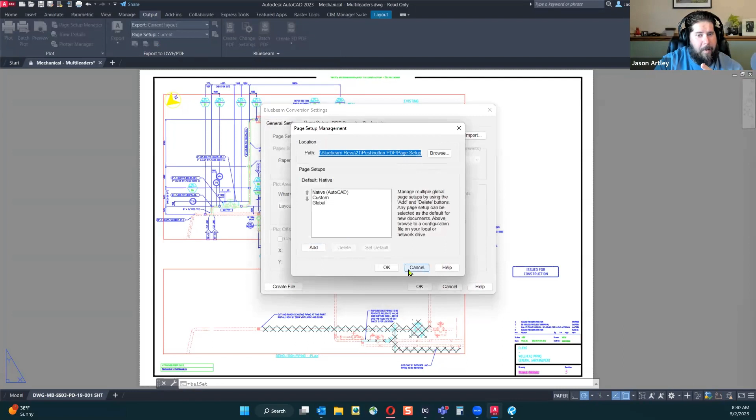I could choose my SHX fonts. I can create my file. There's nothing in here that's going to allow me to take my layers. And if I'm wrong, please let me know, because I've never seen it. And there's some other things in here, and it will do bookmarks, which is cool, but I've never seen it either. I'd love to know if anyone has found it.

Whenever I'm in AutoCAD or Civil 3D and I'm printing PDF, I don't bother with these tools. Now, if I was doing 3D PDFs, sure, in AutoCAD. If I'm doing 3D in AutoCAD, that also means I'm getting kidnapped, and you should call the authorities, because I'd rather be using Fusion for that.

But yeah, I mean, the plugin for Revit is usable, I would say, right? Because you get the ability to create 3D PDFs. You also get to, from an architectural standpoint, for those architectural folks, or even if you're just receiving an architectural model, the ability to print rooms—rooms are what they're called in Revit, and spaces is what they're called in Revu.

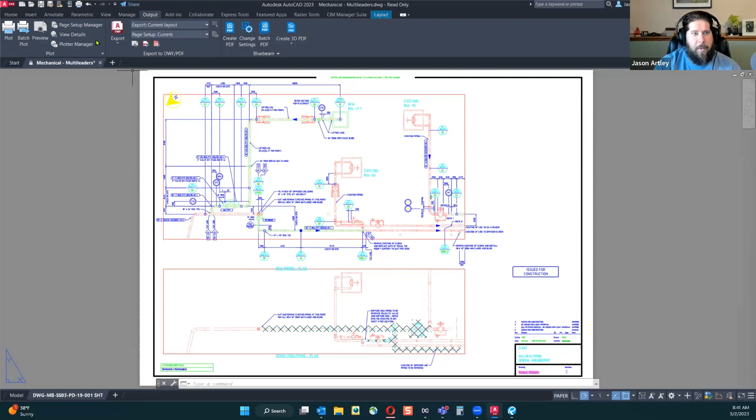Yes. So if you're in AutoCAD and you want to print to Revu and take advantage of layers, let's go back, let's look while we're in here. There's no plugin yet, Doug. That's good for 24. Yeah, that's good to know too, Doug.

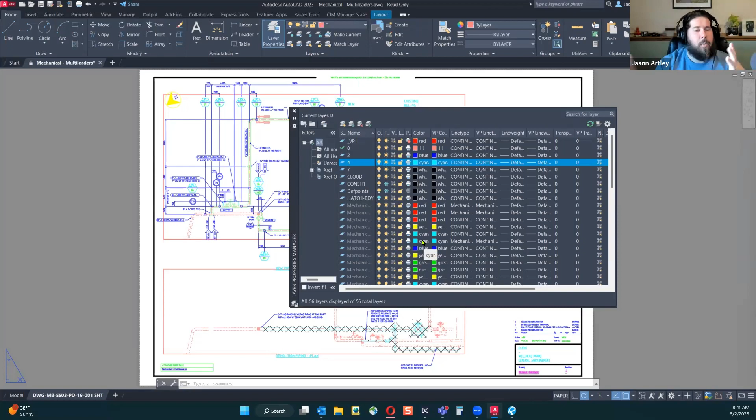Layers allow you to turn things on and off. So you can see when I toggle them off, some of these callouts are going away. I can change my color. I can freeze them. I've got control of if they can print. This is the backbone of using AutoCAD. It's like having a green pencil and a red pencil and a blue pencil—each one is going to symbolize something else.

So unless you're really old school—well, sorry, seasoned—and go line weights. Yeah, pen plot styles, those are the good old days. For those of us that didn't know, back in the day there were pen plot styles for the specific pen from the plotter to do line weights, and typically it was just the color association to the pen plot style you're using in your plotter.

And the plotter actually had a pen, it would go grab the pen. Yeah, oh yeah, nightmare fuel right there.

Flashbacks. All right, so I hit the plot button here from my quick access toolbar in AutoCAD, and I'm going over here to choose my print plotter. Oh boy, I got a lot. Microsoft Print PDF, Bluebeam PDF, and AutoCAD PDF. I've got all these settings.

Now the one you want is this guy down here, DWG to PDF. Why do we want this one? This one gives us a button that the other ones don't. So I'm going to go to Bluebeam PDF - see that? There's nothing here. But when I go to DWG to PDF, I get a button, PDF options.

When I select PDF options, look at this - include layer information. This means it's going to incorporate that metadata of my drawing layers into that PDF as we go.

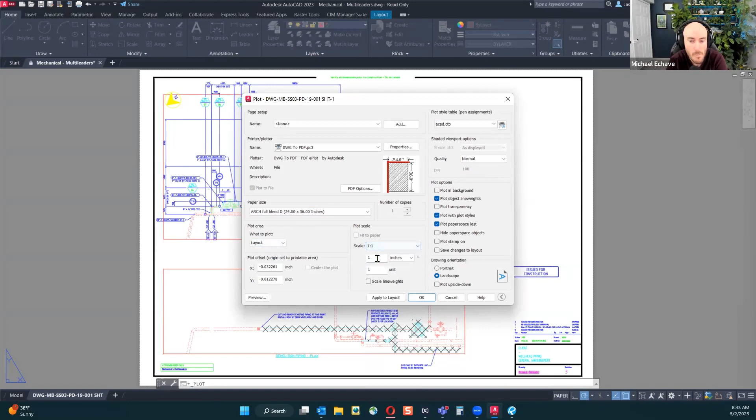What in the world is going on here? So this is a metric drawing, so now I'm really out of my world. What paper size do I want for a metric drawing? I have no idea, oh boy.

Metric people, look away, it's about to get ugly. A0 is what you're saying? A0, there we go. Maybe - let's preview, let's see. It doesn't have... that ain't gonna work.

Now my window popped over here. I swear I've printed in AutoCAD before, by the way - this isn't my first time. It's just... why is it metric, A0? It's just out of the box. Yeah, yeah, this is out of the box metric.

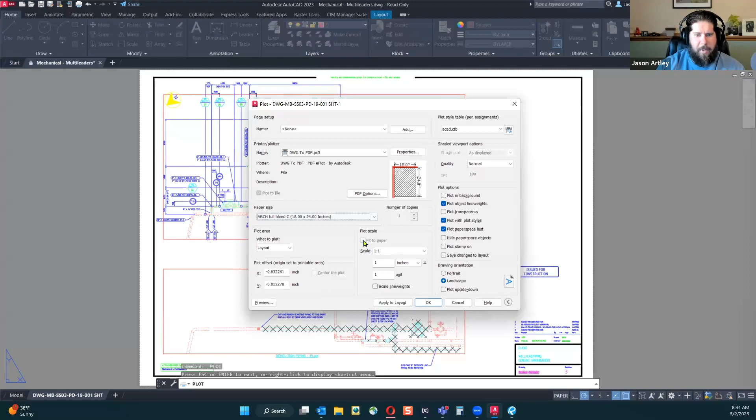Where's my fit to paper option? I can't live without you. I was intentionally wanting that to make Brian cringe.

Using layout - is that what my difference is? There we go, fit to paper, send to the plot, get her done. There we go, that's close enough. We're playing horseshoes here, all right.

Sheldon, yeah same - back when I was in industry, one of my firms that I worked at before used pen plot style too, even when they weren't plotting to a plotter anymore. That's still how they had their assignments and adopted layers. So fun stuff.

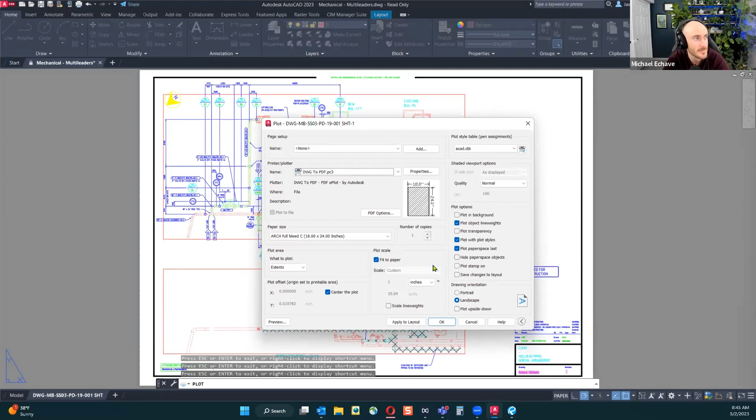All right, there we go - layer information, good, fit to paper. Now I could set this to scale, make it proper, but again, we're going to go into Revu and we're going to calibrate it. So this is all intentional, by the way, totally.

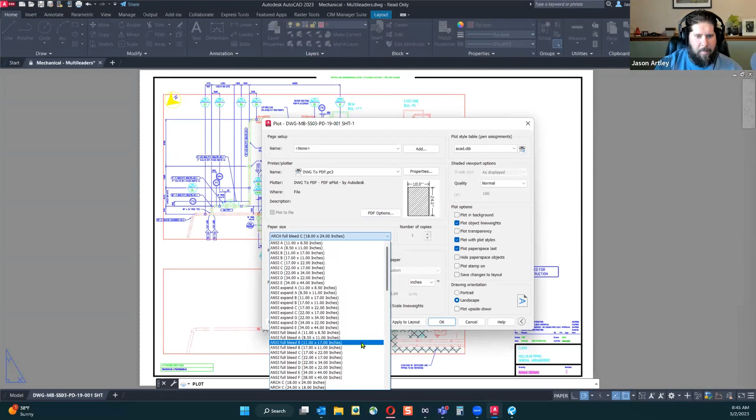So wait, Bruce is saying use C in metric. Fine. I don't have a C in metric - Arch, ANSI. That's still inches though, and it's close enough. I would just print it. Print it, we'll do it live. All right, we're gonna hit OK.

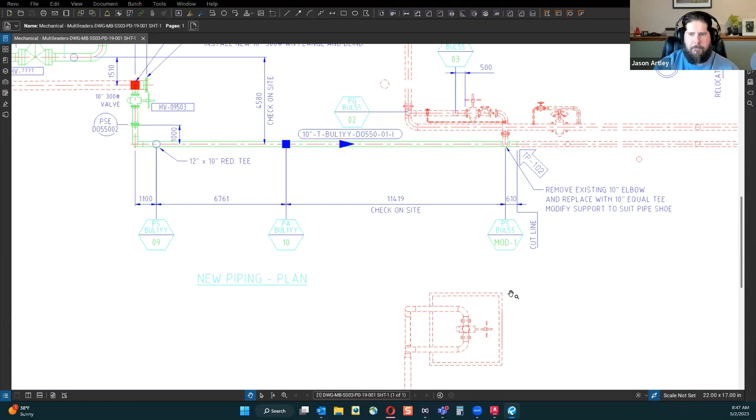Just the liability of having a scale - that's always a questionable offense, I would say. So I think the best would be to have a specific known dimension from where you're at, or a scale bar. Yep, scale bars - they've been a part of drafting practices for over 100 years, so why did we stop?

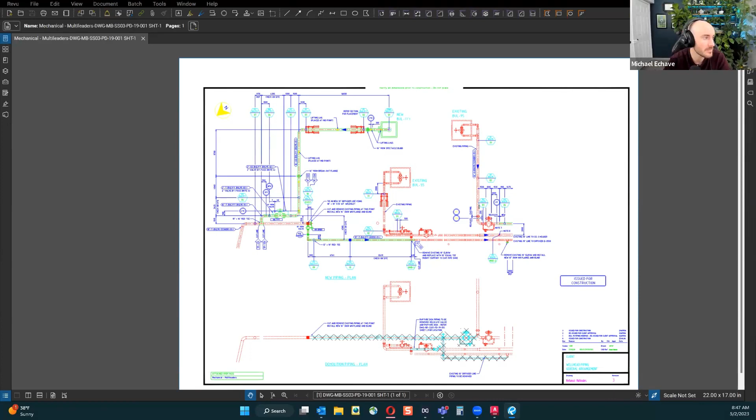So there's that, because folks thought it was more meant for actually having your scale and then having your table to measure it from. So I still think it's valuable here to calibrate and review your own. But we'll get a little off the CAD side a bit.

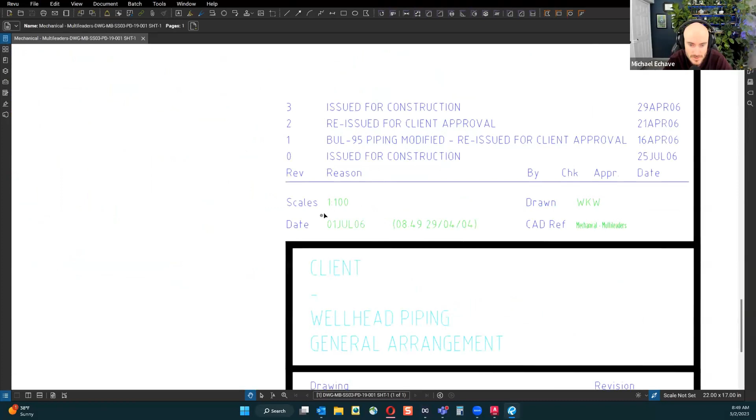See, there's no scale bar here. Scale's one equals 100 though, so there is a scale, but there's no scale bar, so I have no reference. Now in this drawing I do see that I have dimensions that are metric that I could calibrate to. This one, check on site, that's not a good one, right? I want to go check a couple different ones to make sure this works.

Now, one thing to mention, this is a metric drawing, and I've never done metric stuff in Revu, so this will be interesting. That's why I'm surprised you picked a metric. I'm just experimenting today, we're doing something different, we're branching out. It's May, we're blooming into new things. It's way past bloom season here though. Is there a metric setting in here? Units? All I know is it reached 100 this last weekend. It hasn't even hit 60 here yet. So there's that, all right, let's get on with it.

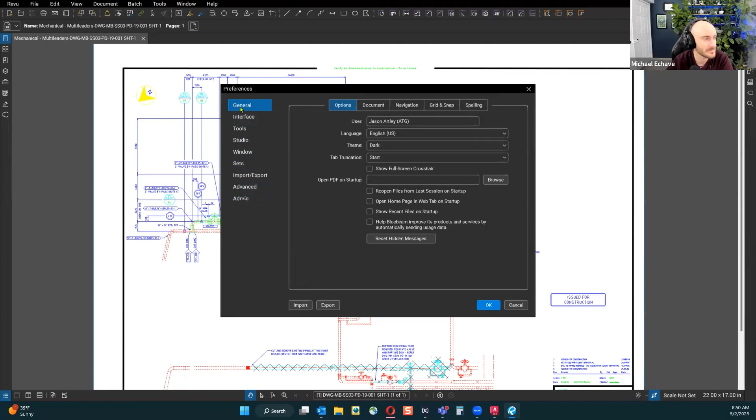So I'm going to calibrate. And when I'm calibrating, I want to choose the longest distance that I can to make it a little bit more accurate. So I'm going to go after this 16,830. It doesn't say check on site like that one does. So I'm going to calibrate to this one, and then go check a couple different ones and see if it works, right?

So when I go to apply scale to pages, bottom right corner - how else can you apply scale? Does it really say that, Alex? It says do not scale. Oh, verify all dimensions prior to construction, do not scale. I see what you're saying there, Alex, but I saw nothing. All right, like that, we'll just erase it. We're playing around here, we're playing around. All right, rabbit hole, keep me on track.

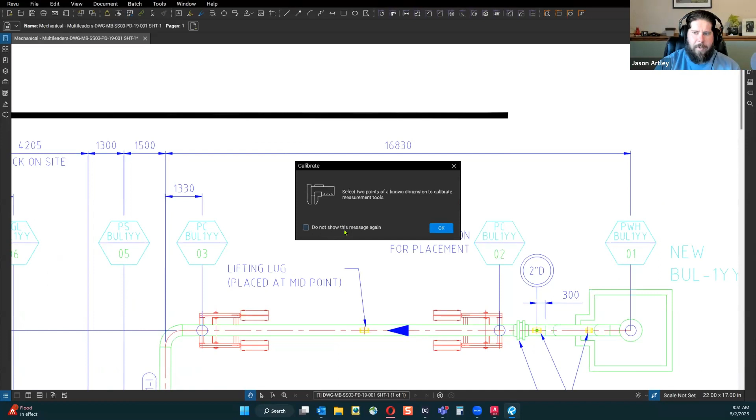So I'm going to go to custom and go to calibrate. It's going to say select two points of known dimension to calibrate measurement tools. Now, never turn this off. I wish this was not a thing, because you should always be aware that you need to do this. And I'm going to snap. If you're at the point where it makes sense for us, but if I was in the software all day, I wouldn't want to see that UI.

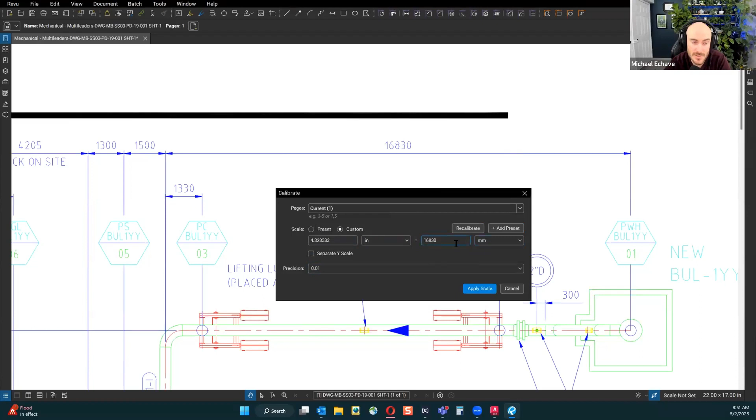So this is where things get weird, because this thinks I'm in millimeters. So what I just did is picked one point from the left, one point to the right, and then it went away. Let me do it again. Yeah, that's the actual measurement on the page. The other, just go to your measurements panel on the right.

Oh, my Zoom window is blocking me.

So the measurements on the page, the one on the left, is that measurement. Basically, in paper space, this actual measurement on the paper from end to end is that. And to the right is what the actual measurement is. So you're all looking at what that is.

The other dot next to custom, to the left, there is a preset. Preset would be for a preset dimension on the page that was printed at scale. Now that I'm getting more into this, I'm always like, yeah, of course it's printed to scale. Well, that's because I printed it, but we're not always in control of receiving PDFs.

So I would just be hyper aware of what we're using to scale our PDFs and get accurate measurements from, and how—I guess, who's liable, right? That's always going to be the question. Just things to be concerned about.

Yep, and there was a question in the chat—we're crossing wires here. I like that term, Alex. I'm going inches to millimeters. Now, 1 inch equals 25.4 millimeters. That math is pretty sound. That's all Revu's doing, is that math for me, 1 times 25.4, or whatever if I was going to centimeters. Well, we can see.

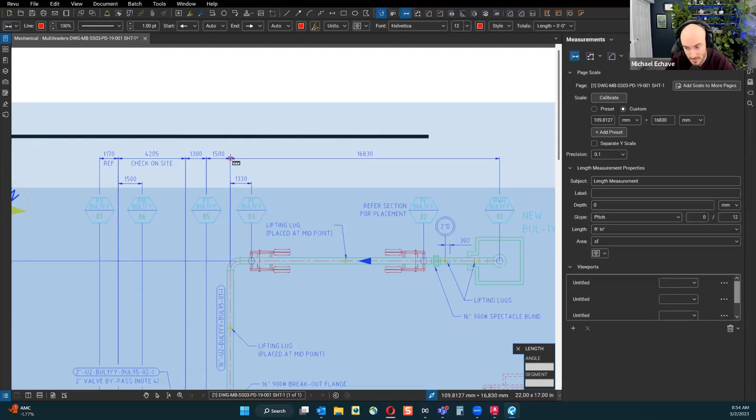All right, so I set the drawing scale to 109.8 millimeters equals 16,830. Before we do that, we need to be aware that for some reason, when you printed this from AutoCAD, it came in with viewports. So in the bottom right, there's these untitled viewports here. That's weird. That is weird.

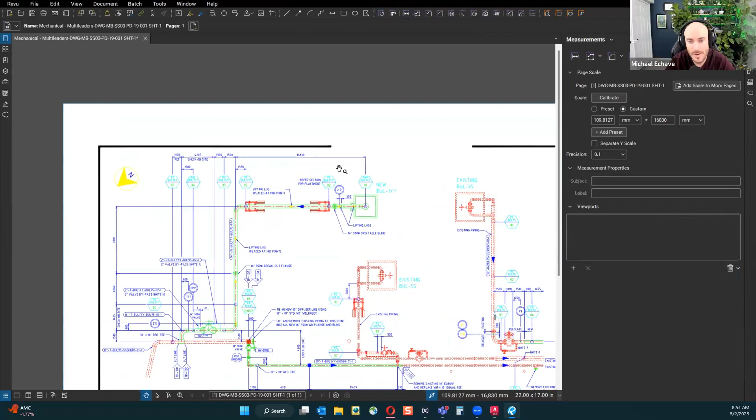Yeah, but they're all—so that came with AutoCAD. Yeah, let's just get rid of those. Clear all from document. I wonder why. Maybe we'll talk about viewports while we're in here, because that's a CAD term that does get confused. So we got the time.

All right, so yeah, as Doug says, if you're trying to be more accurate than 1/10 of a millimeter, you're trying too hard. Yes, correct. All right, so back on track.

I calibrated to this 16,830. Now, remember, this PDF is not to scale—we did it intentionally not to scale from AutoCAD, and we're trying to deal with this now that we have it in PDF format. We don't have that scale bar to reference, so we calibrated to a known dimension. And I always recommend choosing a long one. Once it's calibrated, go in first and check that length and make sure it matches.

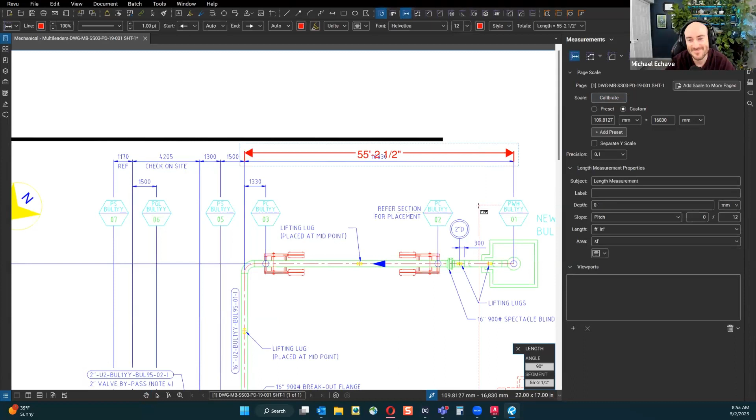Now, again, my units are all goofy, but that's okay, because one of the cool things we did inside of Revu 20, when that came out, was give you the ability—or 20.1 was to give you that additional measurement capability. So now we can go in here and see.

So there's obviously a rounding issue. Well, it's not really a rounding issue. No, it's not, right? That is weird. Because I set my precision—that should not be that. Okay. So Alex says, guessing the error came from switching your units on the set dimension.

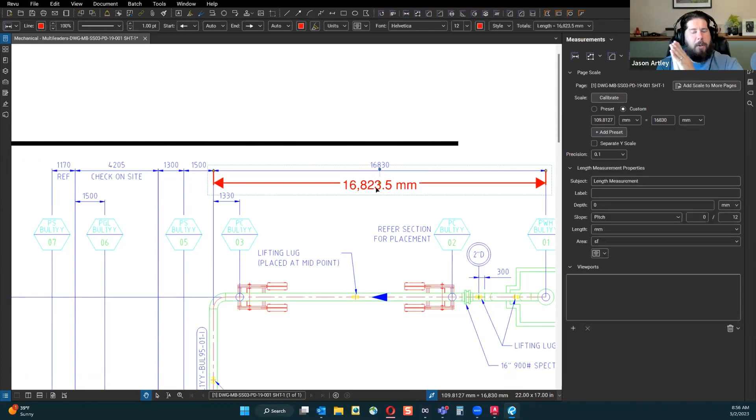That's all right, let's figure this out. This is a problem you may encounter, so let's figure that out. That's what we do here at MCR. All right, it may have been your snap points from your calibration too. Could be—I would calibrate again.

I wouldn't click where the arrows are—I would click where the line is, line to line. Okay, so I'm calibrating again, and we're going to go from the endpoint of that line to the endpoint of that line. And it kept that same 16,830. And we'll go ahead and hit apply scale.

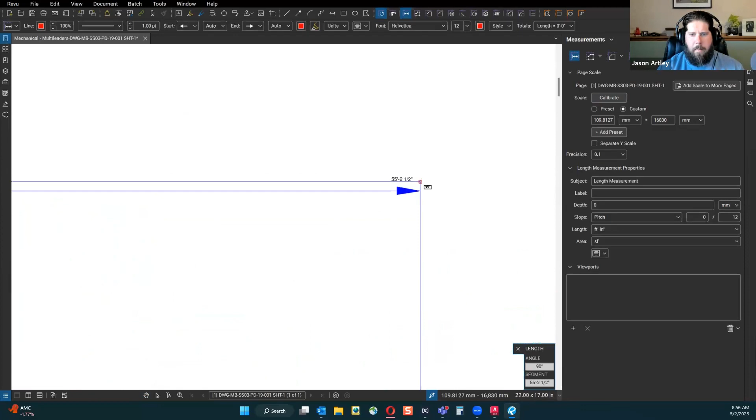Now let's go in and measure again. So I'm going to choose the same exact points that I calibrated from. Same dimension—interesting. So this is telling me... there we go, we're good. We're good now.

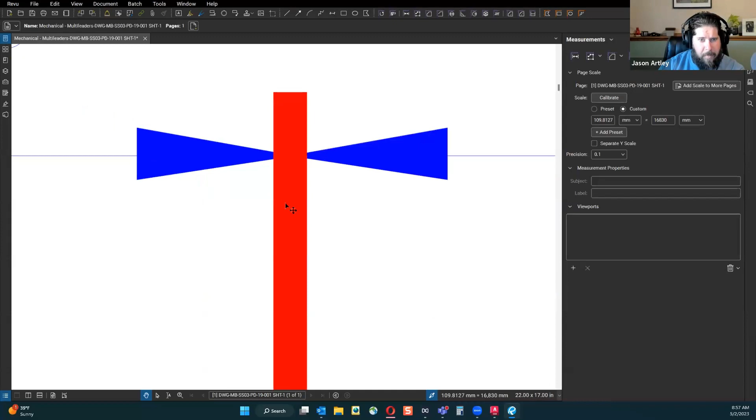So I'm guessing what happened was that when I calibrated, I clicked from the arrows, and I'm not a fan of snapping to multiple things. That just comes from the topic we had the other day. Oh, see, look at that. Yeah. That's not right. So there we go.

Hector had a question: is there a way to embed fonts in Bluebeam, so when others view the PDF file, all the symbols show correctly?

I don't know about embed, but putting my CAD manager hat on from years gone by, I always use a true type font or a Windows font, something common. When you have weird fonts, you're going to get errors when you send your CAD files out anyway. Same thing could happen with your Revu PDFs. But there was an option in AutoCAD to add your SHX fonts, your shapefile fonts.

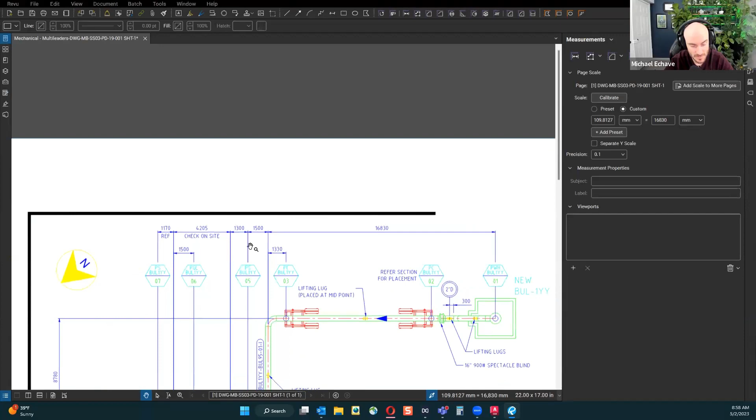Maybe we'll go back and test that if we get time. But I know Revu goes off your Windows-based fonts, so true type fonts. So what I did, I calibrated, I checked that dimension.

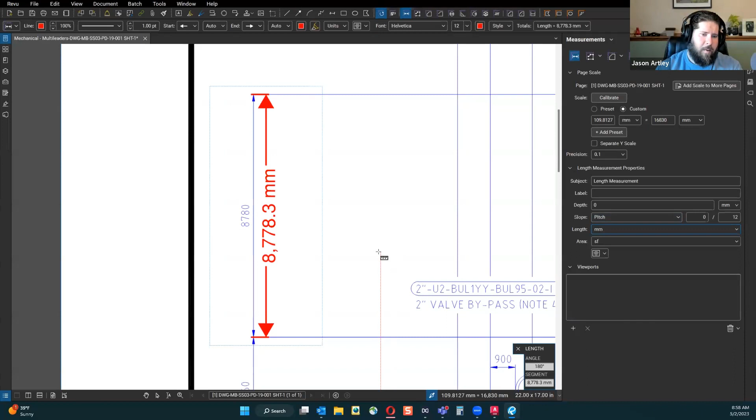Going that way, I want to go check this one as well. So I'm going to come over here, drop in a line. Now again, if we're just getting close enough, that's fine. But I don't like that, this is a sloppy drawing. We're determining, why don't we already just turn the rounding up? Turn off the precision. Yeah, there we go.

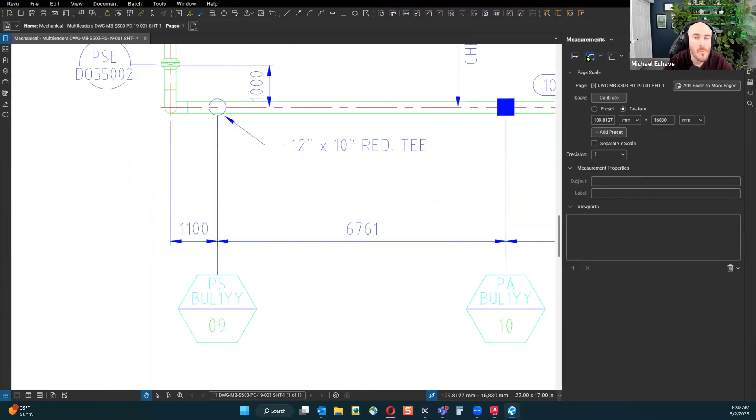What's that we're saying about crayons and sharp pencils and all that? I mean, if you were drawing at scale, it would work. This is just you measuring things from a known dimension, which obviously we're seeing the issues of it. Yeah, the drawing told us straight up, don't scale. There's issues there. But we're going to call this close enough for what we needed to do.

Hey Jason, what would be the easiest way to not have to keep hitting millimeters on your dimension each time? What would be the easiest way to do that without doing that? Saving it to our tool chest. Oh, there we go. Because, okay, let's go do this.

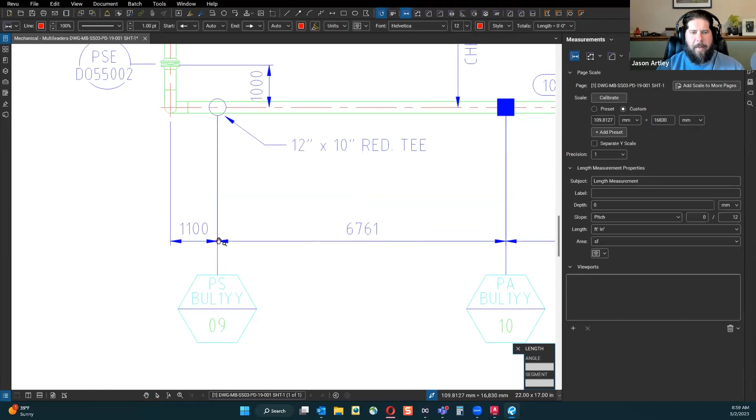So what I'm doing is I keep using the same length tool, and then I come over here and I set length to feet, from feet and inches down to millimeter, right? Now the next time I go place a dimension, it's still going to default back to inches, right? So if I come in here and I actually save that setting, go to my tool chest, my recent tools is going to have that length measurement already set up for millimeters. There we go. So if I wanted to set that up, have my millimeter one, I can just drag that down and keep using that tool instead of doing the extra clicks.

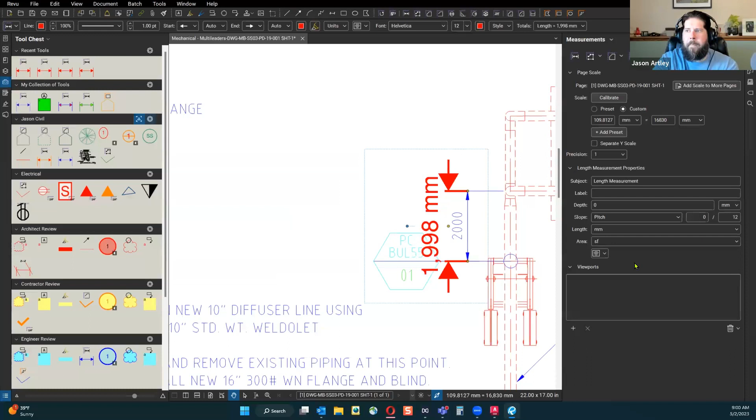Yeah, I bet Doug has a bunch of them since he works in imperial and metric back and forth. Yep. In the measure... okay, that's a question, David.

In the measurement menu, when you are setting scale, what does a precision value of 1 mean versus 1 inch, 1 foot, 1 mile? That's just the precision of rounding. So the precision is what it will round to, and it changes per the dimension type as decimal places. Yeah, this is millimeters, so it's decimal places.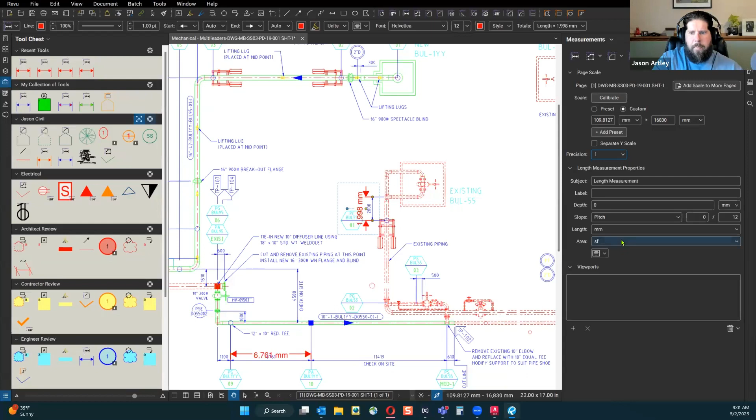Going back full circle, viewports. So you do have the ability to add viewports here. Jason scaled the overall page. If he wanted to, you can create as many scales as you want, you just hit the plus button down there. It allows you to do the same type of calibration scale setting in a designated area. Essentially you're just picking the area that you want the scale to abide by. Correct. So let's go back to AutoCAD.

AutoCAD viewports, if we want to go back. So in AutoCAD you have model space. We'll try not to get too deep into CAD here, but you have model space, this is where you're going to draw your entire drawing, put all your stuff together, and then you're going to manage those through viewports. The viewport is what actually sets it to scale to get it to a paper size. On here we see we have 2 different viewports, and I can activate those and click inside there to see down into my model space, right?

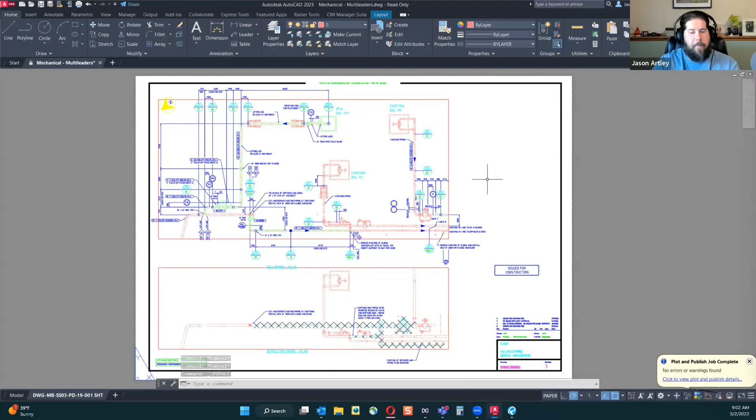So when we printed, those viewports came over into Revu, but when they came over they were untitled and they were unscaled. These viewports should definitely have a scale associated with them.

So if I go to my properties... I've got too many windows, hang on, it's coming. I have a standard scale, so it's already set at 1 in 100, was what it should have been, right?

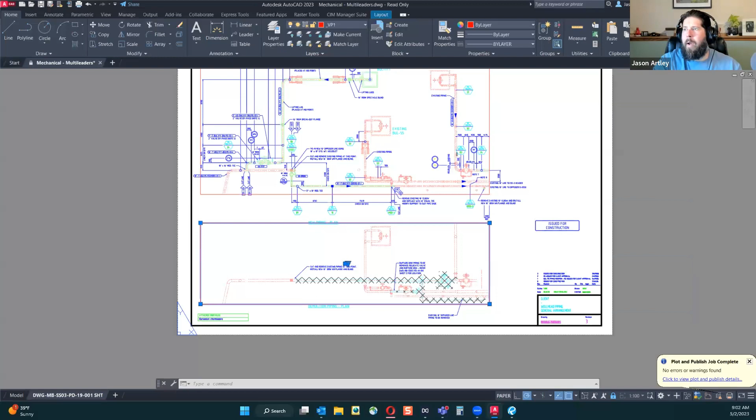So now when I go back to Revu, I had those scales, I can add them back. With that viewport, I can associate a different scale from what I've got here already, my calibrated garbage scale. So if I come in here and add one, I'm going to select that region, down in this area, let's say this is a different scale, or actually this is supposed to be 1 inch equals 100, or 1 to 100, right? I can set that up and hit OK. It is going to highlight when I get in there.

So 1 centimeter equals 1 meter. I can go in here and further adjust my scale, then apply that. So now when I jump into this area, we've tested this before when inserting images to scale or symbols to scale, but I'll go in here and place a length measurement. Oh, no, I won't—I'll use this length measurement and just grab anything.

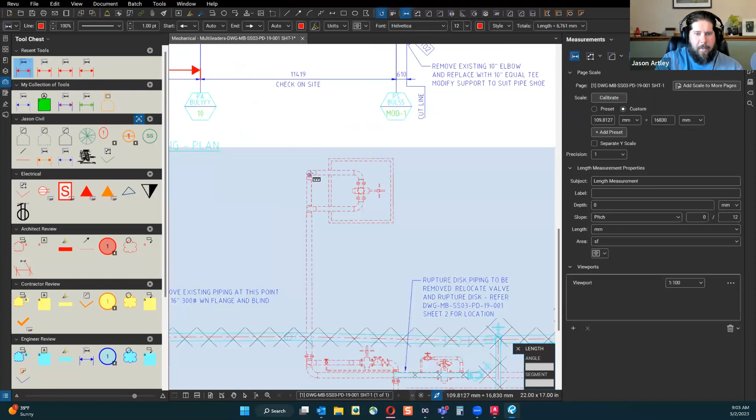And we can see it's going to be kind of special. So viewports, I don't mess with them a whole lot, but then again, I usually print properly from Civil 3D and don't have to deal with this stuff.

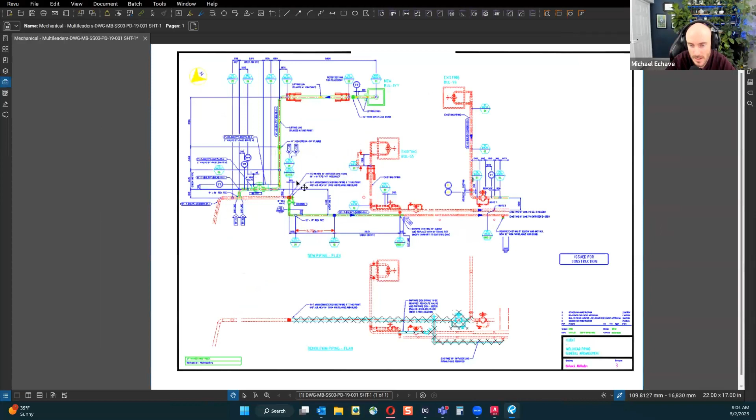Viewports, typically from a building design perspective, there's details, there's different views on sheets, so that may require different scales. So it's good to have that ability. Also, when you're placing custom tool sets to scale and you have 2 different scales on each page, or on the same page, you're going to want to be able to do that.

Correct. Now, one of the things we didn't check is that when we came into Revu, we didn't look at our layers—there we go. So I clicked on the layer panel on the left, and there are all the same layers that we had from AutoCAD, but we have the ability to turn them on and off by clicking the little eyeball. We don't have the ability to change their color, and we don't have the ability to freeze them—well, I guess you can with lock. It's close to freeze, that's a whole other story.

But in here, I can toggle things accordingly. And then I can go in and make the adjustments that I need to make. So if I didn't want to see those dimensions, or if I didn't want to see certain values like that crossing out or that demolition or whatever that's supposed to be, I can remove that.

So this is a good thing and a bad thing, right? Remember, if I'm printing to paper, I don't want somebody to erase things that I've made. And if I'm printing to a PDF with my layers enabled, someone can erase things if they turn off those X's that we see there. Let me zoom in a little bit. If I turn those off and then reprint it, I've totally changed the idea of that finished drawing. So be careful with this.

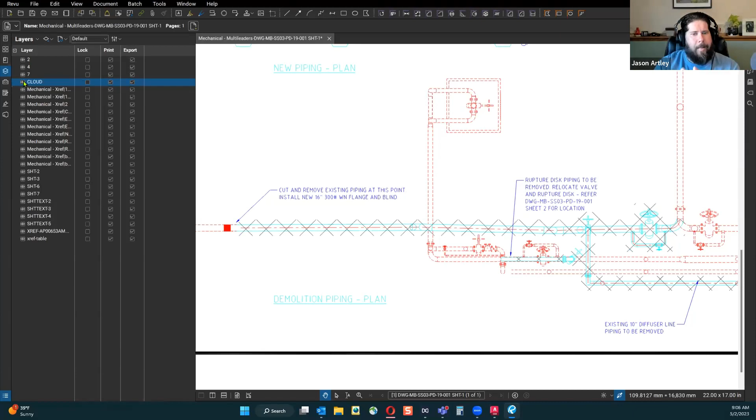I showed you how to add the layers to the PDF, but sometimes you might not want to do that, so be careful—it depends on who you're sending it to. If I'm a drafter or designer sending it to someone else in my firm to review, they might want to make sure you drew on the right layer. So from the CAD management standpoint, I like that. From the engineer integrity part, I don't know.

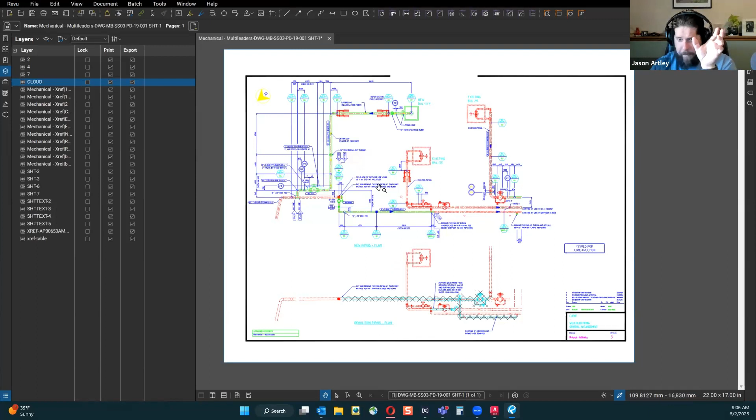Great point with viewports. If this were a civil drawing with a plan and profile, normally profile drawings have a separate scale on the y-axis, and Revu does give you that capability to separate the y scale. So I could have a viewport that was 1 inch equals 20 feet for my plan view, and my profile view could be 1 inch equals 20 feet horizontally, but vertically there could be an exaggeration, as there often is, that would allow me to still scale that properly. So cool stuff.

All right, Greg, you keep raising your hand—if you have a question, feel free to use the chat or the Q&A. Yeah, there we go, or maybe you're saying you like the specific things he's talking about. Either one. Yeah, let me get caught up here on the chat.

Danny asks: when printing from AutoCAD to Bluebeam, how do I get rid of the AutoCAD SHX that shows up in the markup list?

You can flatten it—it's just the type font, it's trying to understand it. So typically what I would go through is flatten it. So this is what's happening: I didn't make this markup, but there are certain aspects of this drawing that came over, and it's even hard to select. I just had it.

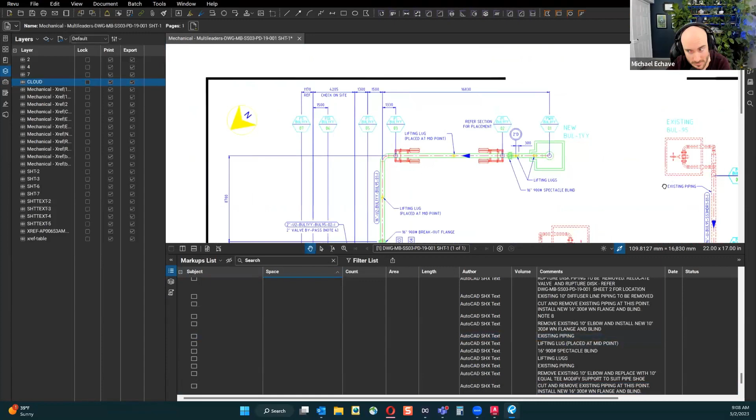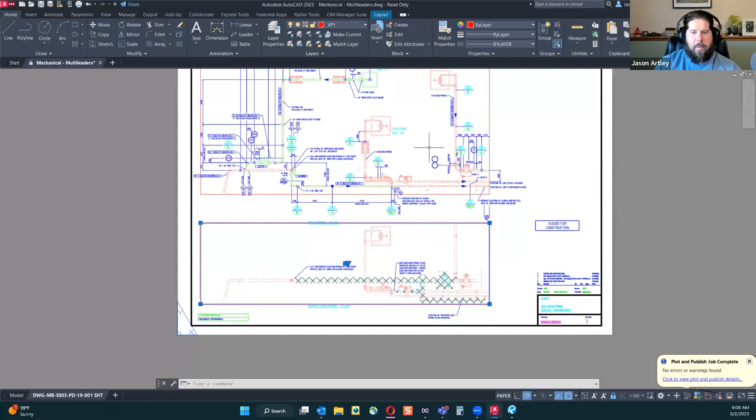That's weird—is that the only way? That's the only way that I'm aware of. Maybe someone from the group has a different way to get rid of them, because they're essentially noticed as a markup. So from here, flattening would be my recommendation. I don't know if anyone else from the community has other experience with this. So what this is doing in AutoCAD—everyone says flatten—is because this font is not a true type font. This is Roman S, I'm guessing.

Oh, standard font. Hold up.

Craig, I haven't had an issue with the Bluebeam writer. Again, Bluebeam, before they created Revu, was specific to the only writer in town that was out of the Microsoft realm, or a plugin, so I don't know.

There might be print settings you're having issues with, Craig. The reason why Jason decided to go DWG to PDF.pc3 file is because he wanted the layers, and Bluebeam doesn't have a layer exporter. Neither does Acrobat. It's specific to AutoCAD, the DWG to PDF.pc3, to get your layers to come out. That's the reason we're using this workflow.

And in this, stop using SHX fonts. Yes, gosh, so that was the problem. Let's just hit the nail on the head here right now.

Just stop using fonts that you like that aren't read by all other firms, which use Windows-based programs for printing. I think that's what they call it... I don't know, I was looking for some analogy. But what happened when I went to my PDF, right?

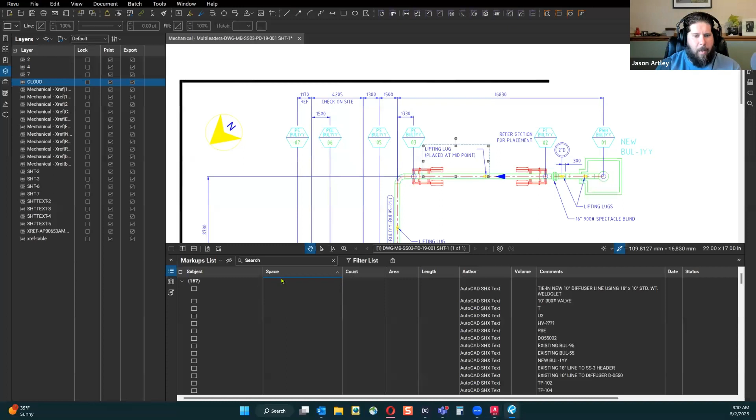I've got all these SHX fonts, and the question is, how do I get rid of them? Well, obviously the best way is to stop using them, because if we go back to AutoCAD, all these fonts are using the standard font, which uses an SHX file.

Now when I pull this down, there's a different icon on the left. It's hard to see when highlighted, but you have that AutoCAD icon that looks like some calipers with an A - that's SHX, and then we see the TT for TrueType. These are all Windows fonts, meaning anybody who views this with Windows shouldn't have any errors.

This is where, CAD manager hat on, you set your CAD standards to use TrueType fonts. Because what's going to happen is if you send your drawing out to somebody who doesn't have your weird ISO whatever - and even if I've got a lot of Esri products installed, some of these you're not going to have either - so that's not always the case, right?

Wow, I got a lot. I would just use one that Windows has natively, right? Yes, go to your Windows file, pick out from there whatever cute font you want, like Arial, since everyone's going to have the same Windows fonts, right?

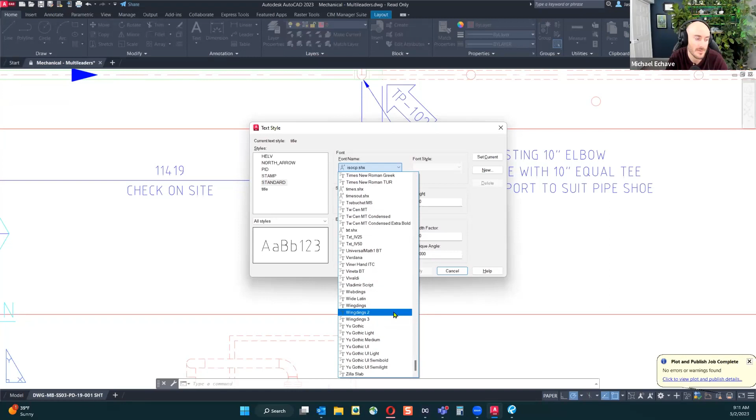You don't want to send a file that has... I've been there, done that, it's just a lot of extra work. And then people are like, why isn't it seeing the same type of text? Well, if we would have just used the same text font at the beginning, it would have all been good. Yep, we're not hand drafting anymore.

So that's why we got the SHX files in the first place, right? So when we come back over to Revu and we want to fix that, we're just going to go ahead and flatten the sucker - document, flatten.

I'm not even going to allow unflattening, I'm going to flatten this. And now when I go to my markups list, it's going to be blank, and it's going to assume that all those fonts are there.

And you can still see the layer association here as well, so the layers don't go away, which is great. Does the line work still go away? Can you turn them off? Hold on, turn some of them off.

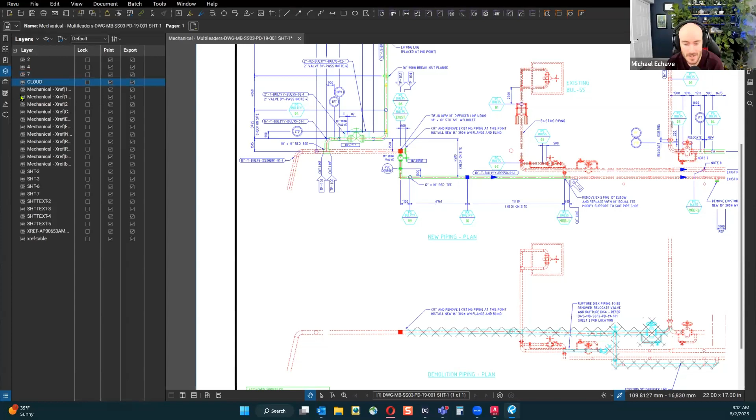Yeah, oh, it's still good. Okay, yeah, I was worried. But what happened was...

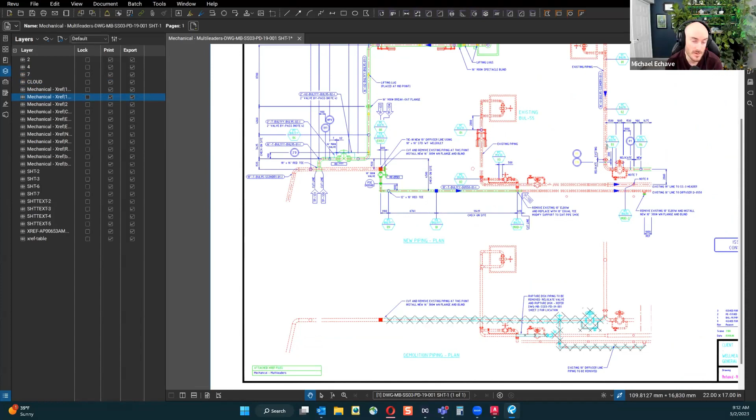Revu is trying to interpret the font style for it, which would then come into you editing the font. So that's why it was trying to interpret the SHX file for the specific font, so that when you go and edit, which would then lead back into - if it wasn't a TrueType font, I bet you Jason can't edit some of these texts too. So that's going to come full circle.

I have a PDF that won't let me edit text because of the font. So again, full circle - if we would have used a font that Revu knew, which is Windows based fonts, then we could edit the text. But since we can't...

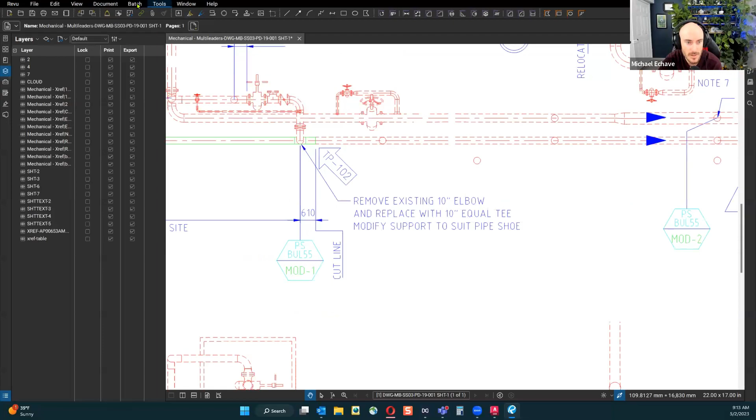So again, those SHX fonts had their place many moons ago, but we've moved on. You can run the OCR right now and see, but I have a file that has the same thing. So as you run OCR in the background on this one, I'll quickly share mine. Basically, I had the same issue where we used to use SHX files back in industry.

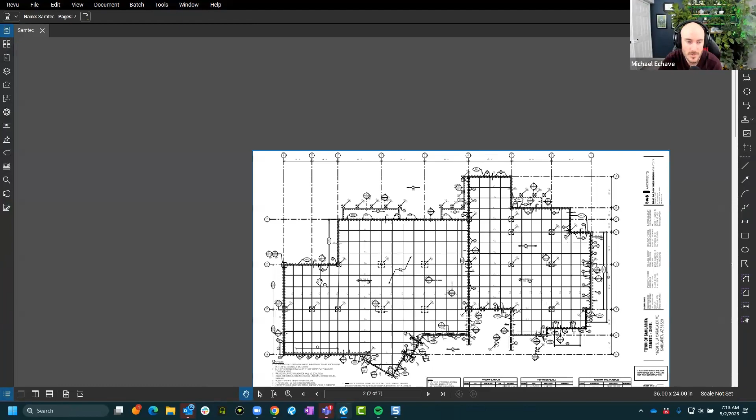That's where my complaints come from. That's why I'm so big on not using these file types. But as you go through - I think it was this sheet, maybe it was a different one - as I try to edit some of these, it won't let me edit the type of font that it is.

So it's like, well, where is this font? I can't find it. I can still select it, I can see that it's in here, right? So to each their own. That's an interesting one. Arial narrow is the answer.

Let me get caught up on the chat. So going back, we're talking about using OCR. Now, you don't have it? I don't have it, I didn't install OCR - I've got a separate big install I didn't do, and I don't really have a good reason for not doing it.

But let's talk about this. When we first started talking this morning about the versions of Revu, there was Revu Standard, Revu CAD, Revu Extreme, and you had to have Revu Extreme in order to get the OCR function. That's no longer the case - the OCR function is included with Basic now. However, it is kind of a separate install, and it's almost as big as Revu is. It's like a gig.

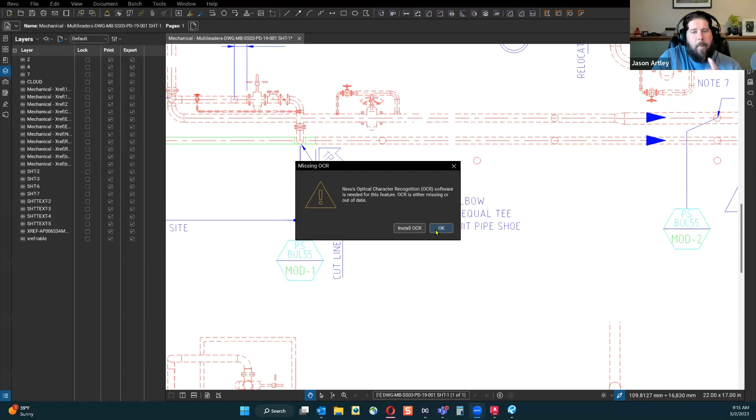Yeah, it's pretty massive, but what that will do is allow you to get optical character recognition, where it will run and say, hey, I know this is an R, but if you look close it kind of looks like garbage, right? So it will figure that out for you. Yeah, I wonder if you'll be able to edit it after too.

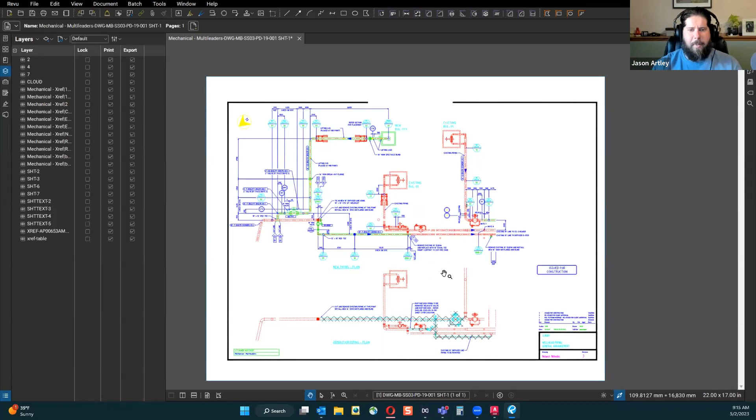Yeah, we'll see. I picked a really weird drawing, so thanks for sticking with me and playing imagination, because I don't normally open this drawing. Now, with that said, there was some mention in the chat that AutoCAD 2024 has some new SHX capabilities. I didn't use 2024 today because there's no Revu plugin for it, and I wanted to highlight that plugin. So I'll maybe go test that later today.

Let's be aware of the compounding issue of using SHX file fonts, because you have this PDF issue, and we also have an issue when you go into Revit. So think about the design teams, because we're all one team, right? As we're building a design, think about what issues other people will have down the road from printing and plotting from your specific font file type that you like. It's a ripple effect, a downstream effect we should all think about - you may have gotten it printed out the one time the way you wanted, but what about other people receiving your DWG and trying to print and plot those?

It's just being aware. There was another thing saying that Bob had something - if you have an HP page-wide plotter, try using HP Smart Stream to send PDFs to the other plotter. Life-changing. Perfect, Arial narrow is the answer, Alex. You should probably make the conversion to true type fonts, but okay.

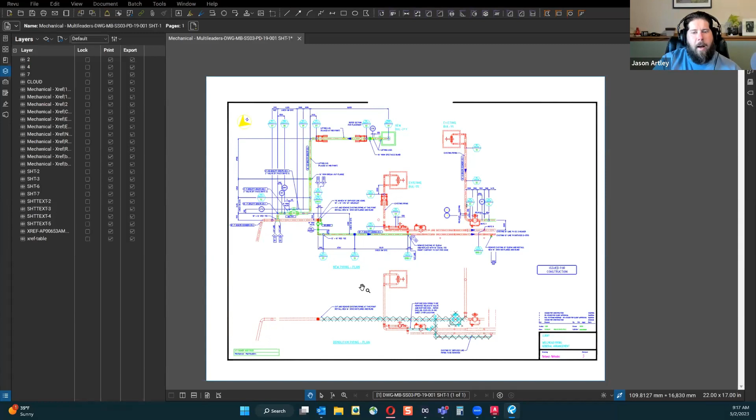There was a question in there, I got to scroll up to find it - can you still use the find command after flattening? If you had OCR set up, you absolutely can. Now, since I did not run OCR, I cannot search for text. Well, let's see if you can grab the text - just go to the A button down at the bottom. Yeah, this guy, let's see if we can grab text. No, okay, nothing - since it was a markup that's flattened.

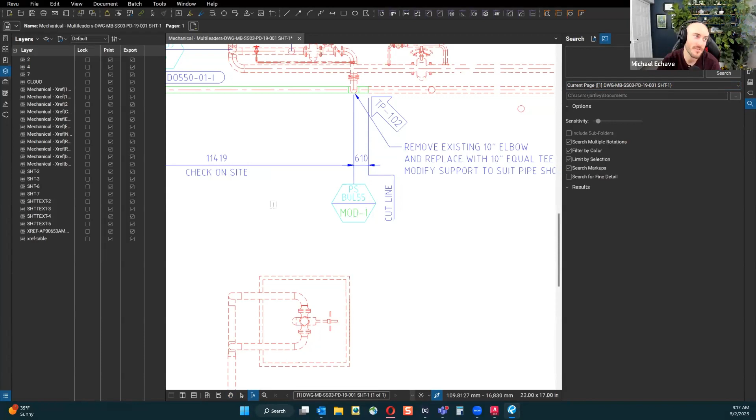So you would have to run the optical character recognition, which is included in every tier now. So if you move into Revu's new subscription based model, everyone gets it, like Jason was talking about earlier, which is great.

Is it able to find it? Oh, that's kind of fun. Optical character recognition would be able to texturize the text, more of a vector-based approach.

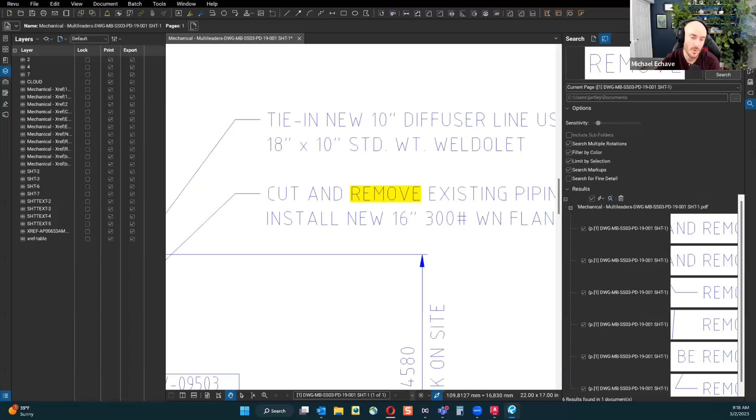But if it is an SHX file, like my other file that I just showed, you may not be able to edit it, but you can test it if it picks up the SHX. I guess that depends on whether your Windows file for text types is what it's using. Just being aware.

Brian put in the chat that if you're using AutoCAD 2024, there's a system variable, PDFSHX. Set that to 2, and that will allow you to search for text, and nothing will show up in the markups list. Brian just tested it - thanks for that, Brian.

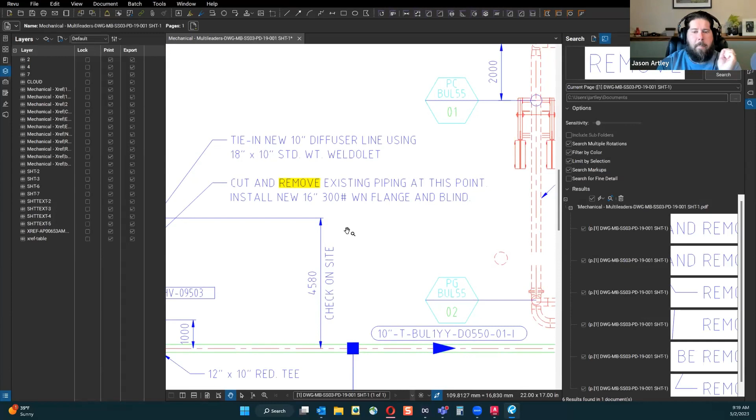And we'll have to do that. So once that Revu plugin comes, actually I don't need it, right? Because if I open up AutoCAD 2024 and use the same driver I did today, we can do that. But we've got about 10 minutes left, so I want to get back on track because we haven't drawn anything. I know, we went down the text rabbit hole.

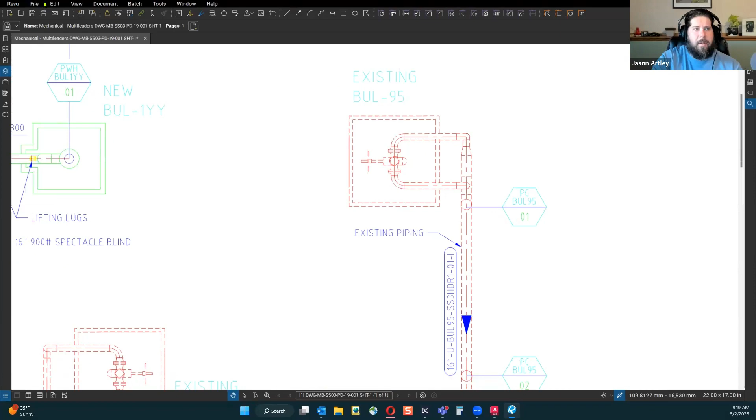Scary, right? So let's get back to talking about using Revu as CAD. Can it do drawing things? Sure. The best way I've seen people utilize this is getting your symbology set up and getting your tool set up accordingly, and we have past videos on that.

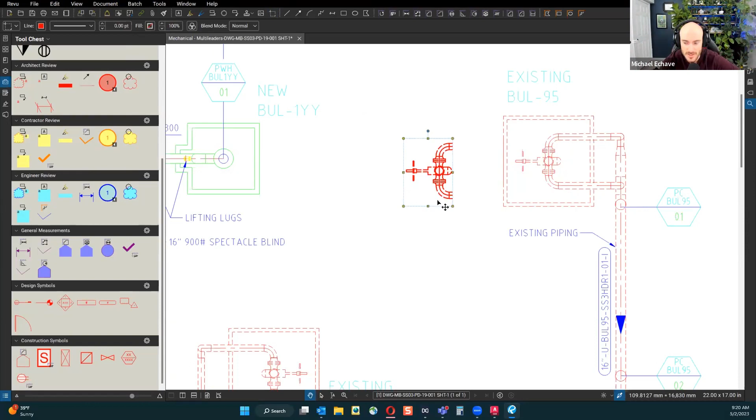Even though I got on my soapbox here and complained about SHX files because I'm tired of them, be aware there are past videos on how to create custom markups and save them in your tool sets and create custom tools. Just so we're all... oh, is it because I was like, why'd that come? It's because, yeah, there you go. Remember last time I had you turn it off? It's probably still set that way.

With that, if I want to draw this little valve assembly thing - again, not a mechanical guy, I'm going to throw out some bad terms - I can go snapshot that and then have that tool and add it to my collection of tools. I don't see any downside to doing this versus hand drawing. I see more upside to doing a snapshot versus a hand drawing. But to each their own on how they want to create their own markups.

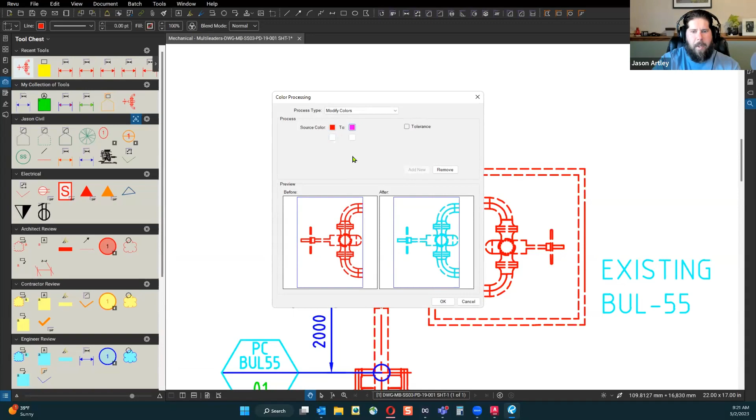So if I wanted to change the color of this - if I'm doing a red line, I don't want that to be red, I want it to be... let's not do cyan, let's do pink, magenta. Now that's a better markup than me just drawing something in with pencil. This tells the person doing the changes what they've got in there.

Now, yes, you can't... I get it, with snapshots. I guess it would come down to the tool, right, Alex? What tool are you trying to create - does it need to be edited, or is it more of a symbol?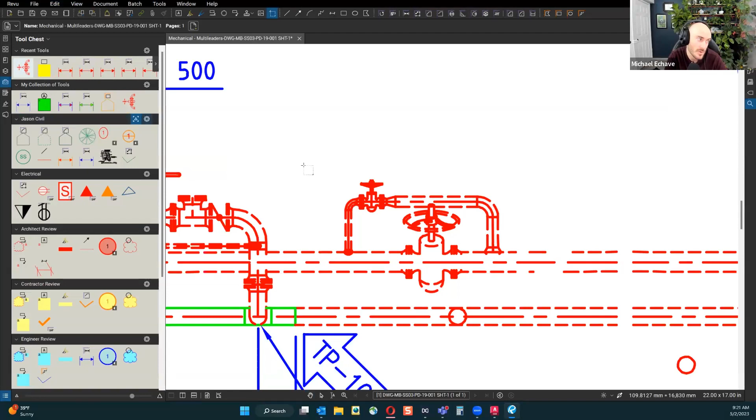For editing, let's say I wanted this valve assembly here, but not in here - I could easily erase that out and then do a snapshot. I could probably just make a cleaner drawing from CAD though. Let's go snapshot this guy.

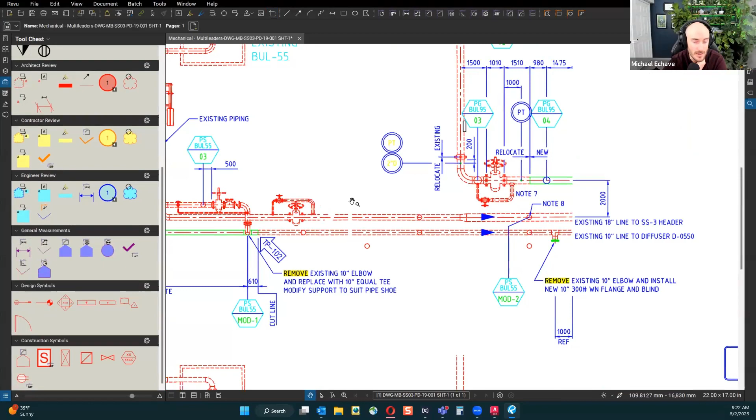But be aware, you can also start to go through and draw a layout if you wanted to. I know a couple of folks that just do their details in Revu - they have a bunch of standard symbols, then finish it off with some pre-created lines. So just being aware that it can be used as... I don't want to say it's a design tool, but Jason can say that versus me.

In that perspective, I'm going to put my Civil 3D CAD manager hat on again. There are times where I've seen people - they usually have PE after their name, not poking fun at you, Brian, I want immunity after this - where civil engineers get into drawings and they haven't touched Civil 3D in a long time.

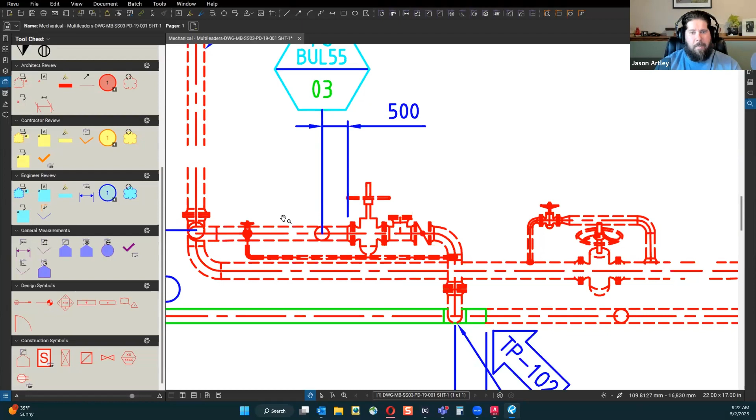And they get in there and start looking around, and they could break things. Or maybe it's a designer, somebody you don't trust touching Civil 3D. Every firm has one - if you don't know who it is, it's probably you. This is an intervention, by the way. But Civil 3D drawings and even Revit models are getting more complex, so it becomes easier to break something if you don't know what you're doing in there.

Revu is a good tool, right? Maybe we can take away their Civil 3D and give them a nice PDF they can interact with, so they can do the things they want without paper. Not only does it save you the cost of licensure, it gives your drawings better integrity. I know I've spent multiple weekends fixing things other people broke, so I'm a little bitter, in case I didn't make that crystal clear.

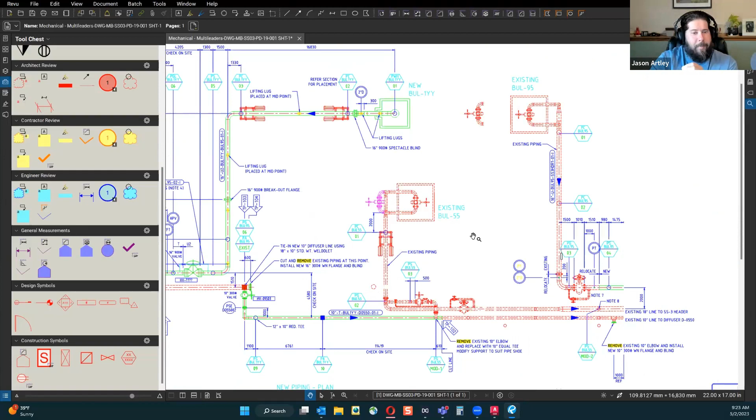So yeah, training is the answer, of course. And if you need training, I know a guy - that kind of comes full circle, right? I've been in this situation where, yeah, actually it's the same, except it's an SE - a structural engineer - but in the structural world.

Modifying the PDF just because it needed to get out the door, but not reiterating it back to the design team. So just being aware that if you do make changes in here, it should reflect in the model or in the CAD environment. If you're just designing in here because this is the route you want to go, by all means - you're not reflecting anywhere but in here. Just be aware, for folks who didn't know, there is an ability to see what was created in the design world and what wasn't, and that's in the way the lines end.

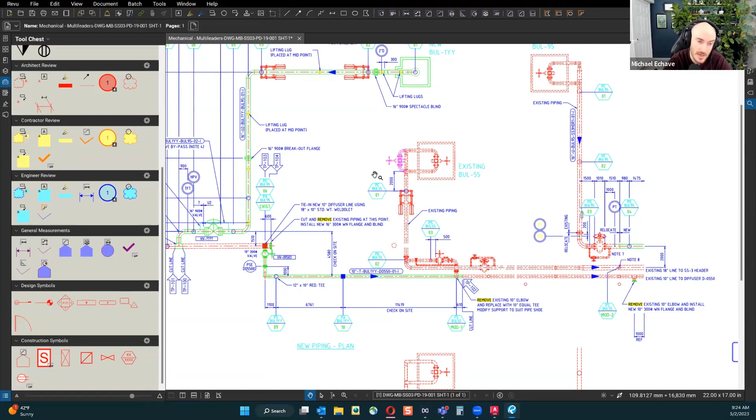If you ever look at a line that's been created in Revu, it is square. If you ever look at a line created in a design environment, it is round. I can share my screen for that.

Yeah, I can show you that here too - oh sorry, too fine, too quick, I'm sorry. Here, you're back. You're back - he's fast, I was already clicking. He's fast, he's quick today.

All right, this is what we're talking about. So here inside of Revu, this is a line that was generated from CAD, and we see the end of it - it's kind of pill-shaped and rounded. If I come up here and draw a line inside of Revu, it's square. So that's an easy way to tell where those lines were generated.

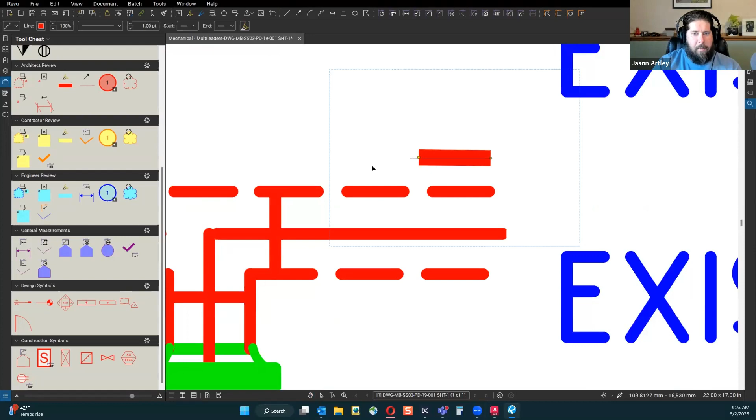Now, does that work when we take it back to CAD? We're about to find out. Another question that comes up frequently - how, okay, if I'm making these changes in Revu, how do I get these back to CAD? Is this updating the CAD at the same time? No, that would be cool, but it would also be dangerous, and we don't want to do that. So how do we get this information back to CAD?

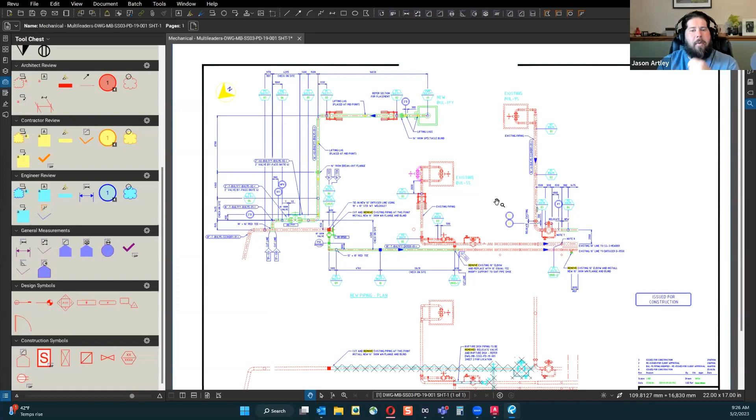Well, ideally, we're talking about the redline workflow. We weren't able to take the paper and put that back in CAD too - someone has to manually go verify things, and we still want that process. I know I've been given red lines a lot of times in my career, and it's like, is this really what you meant? Because this doesn't seem right. And then the engineer will be like, oh yeah, you're right, I missed a decimal spot, or I fat fingered it, or let's do something else here. Having that extra set of eyes on there is an important part of the design process, I feel.

Soapbox, all that other stuff.

But also, how do I get this back to CAD? Well, this is a PDF file. I'm going to save this PDF, and we're going to go back to AutoCAD. Now, I do have the capability to come in here and bring in that PDF file - PDF import, select a PDF underlay or file. I'll go to file, go to my desktop where I named it something perfect, and I can drop this in. Now, when I do this, the window will appear on the other screen so I can't see it - it's going to be a little funky.

It's not going to be geolocated, it's not going to do things right, but it's going to give me a couple different capabilities. I have the ability to choose whether I want to import it as a block, or import it as a bunch of different lines and things. This is going to turn out pretty gross, I'm guessing. But look, it can bring in the PDF layers.

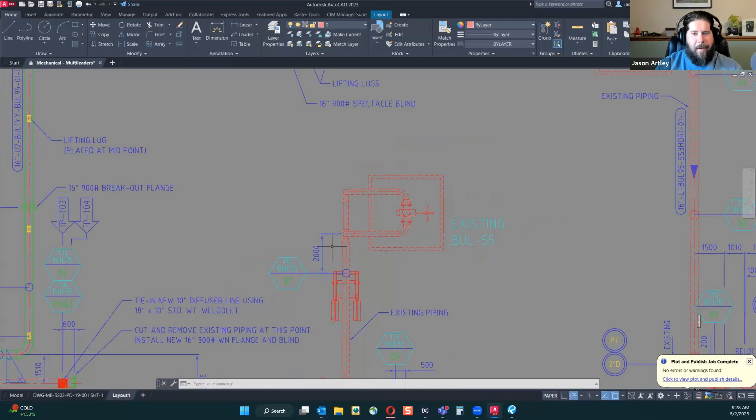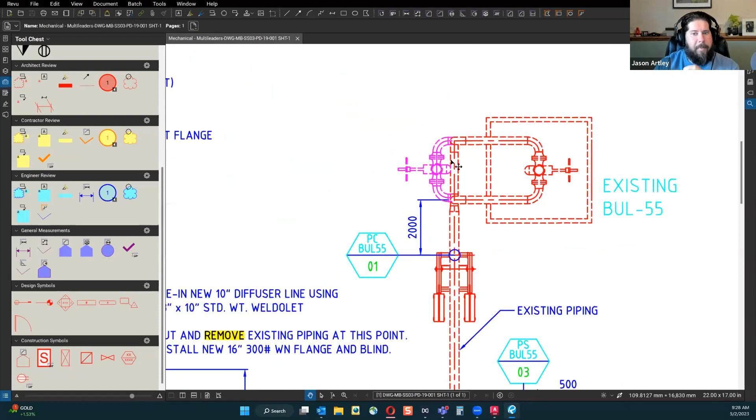Correct. Now I clicked, and there we go - our CAD file is back into Revu. Notice anything? For one, I did not flatten this PDF document. This is all the line work that came from the PDF. AutoCAD tricks, baby. So what happened was I took my PDF, I saved it, I did not flatten it. So this little valve assembly thing that I put in there does not appear back in CAD.

What happens if I flatten it? What if you just flatten that markup? I'm gonna flatten the whole thing because we're going to go fast, we're running out of time here. I wonder, because I'm wondering if you drew things, would it be able to be interpreted by AutoCAD - that's what we're trying to do here with the PDF import.

Going super fast here. But did you draw a small line? I did draw a small line, and I inserted that valve thing. Oh, there we go, we see it here in the preview. And drop it in - totally wrong base point. Again, going quick, I've broken a lot of my own CAD rules today and I feel bad.

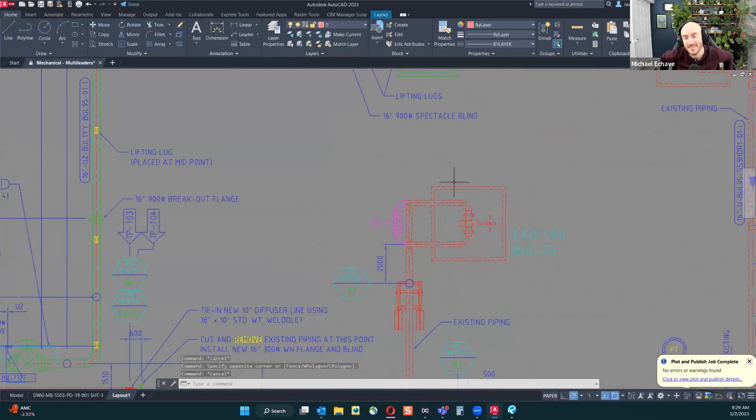So there's that. But look at this - that showed up back in CAD. Can you click it? Oh yeah, my god, that's all line work. So what about that line that you created? Right here, you remember where it is? It's right here, that's it. So yes, I can take it back.

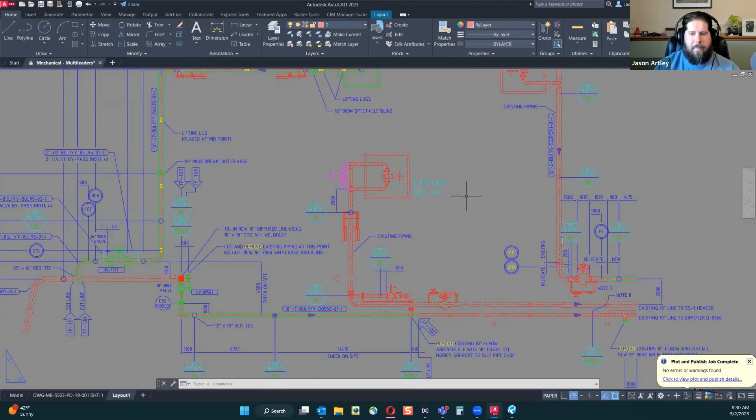But so if you wanted to create a detail and bring it into AutoCAD, then you can bring that AutoCAD file into Revit. Whoa, workflow. Yeah, so we did some crazy stuff here today.

I didn't show you the sketch to scale, we didn't look at drawing lines straight or any of that other stuff. We're still kind of opening up that conversation about Revu and CAD, and we'll have to expand upon this in a future episode. We've done the sketch to scale stuff before, but this topic I know we've never shown before, and I'm glad we were able to get that covered today. So there's some interesting things going on.

Before we leave, last thing to note, going back to the end of the line types - we're not going to really see that thickness there. That's smart, Alex, we're not going to see that square round thing. No, that was just for review, like if you're looking at the PDF, that was my tidbit there. I went on a soapbox about the SHX file - sorry everyone, got a little too into it. It's just something that's always an issue when printing PDFs, which is part of the BIM process, part of our workflow. So just being aware of the ripple effect of choices around text files - there's a lot that can be improved in workflows, but we got to start somewhere.

So there we go, hopefully this was informative for you. We went all over the place, but it's an important thing to discover, to figure out which workflows work best for your firm, and we'll go from there.